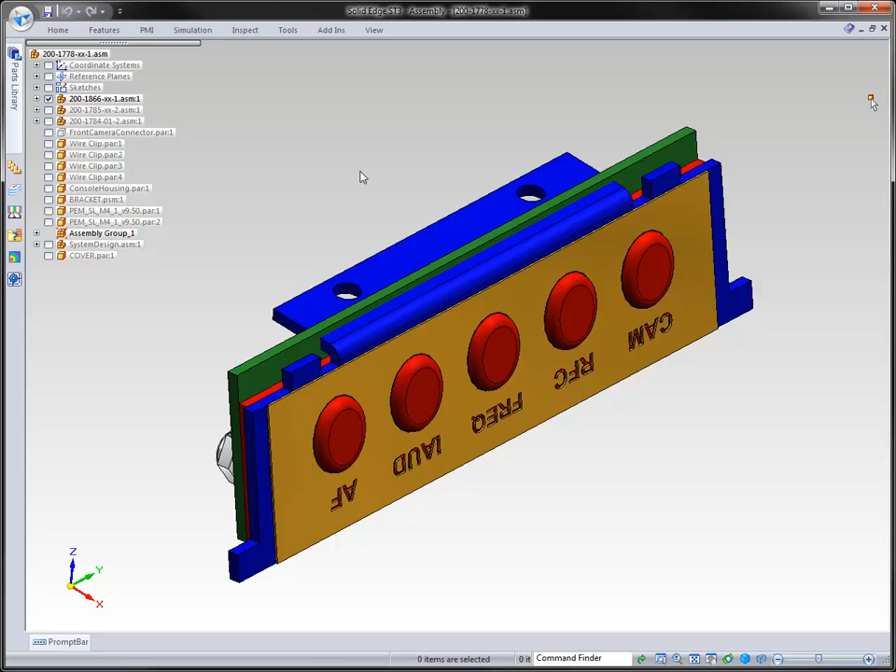With this, we actually have some connectors and some wires that we need to take a look at because we want to build a wiring harness inside of this particular file. You can see we have some connectors, and we also have some connectors for this board up to our camera.

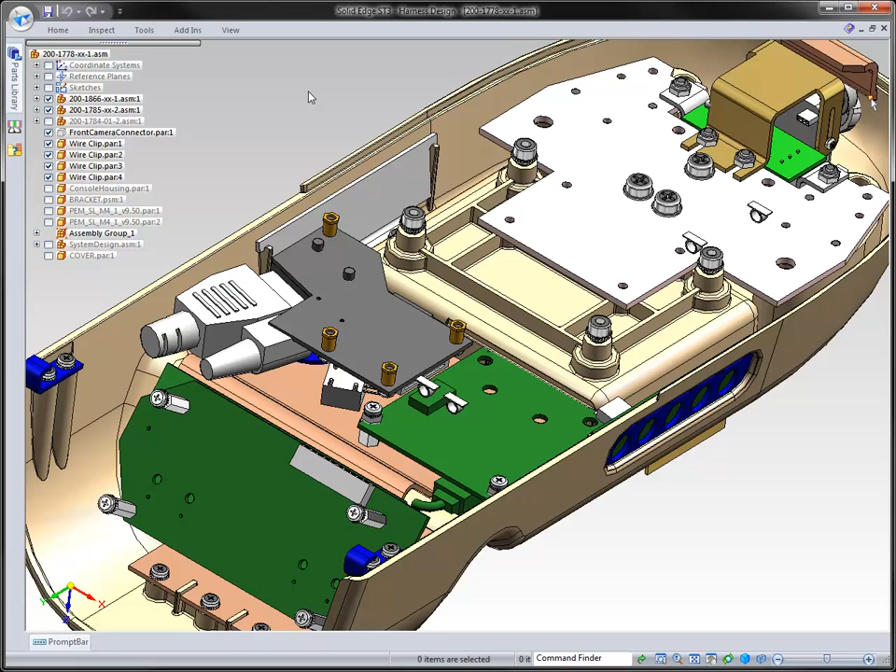Built into Solid Edge is what we call our harness design. Inside of here we want to be able to bring in some information. You can see that we have some other ECAD systems that we can bring information in from, and we have some specifically for this particular assembly. As we go through this, the wizard walks you through and shows you what component we're going to be connecting to.

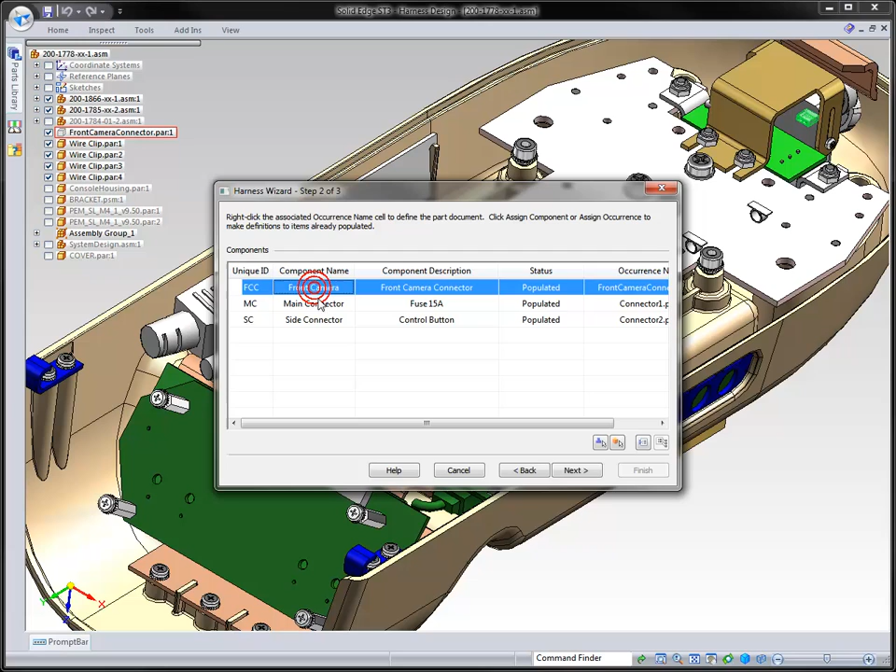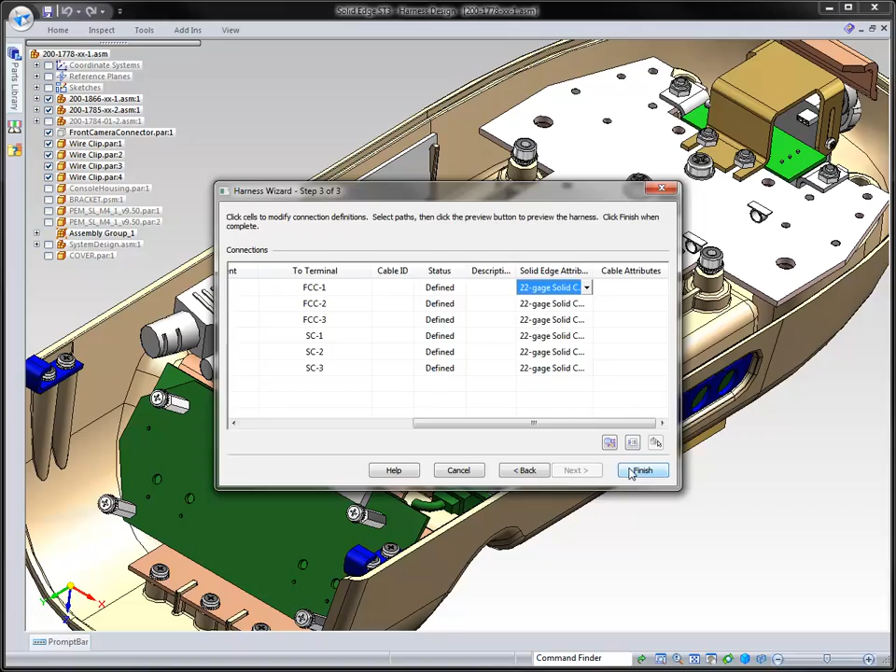In this case, the front camera. We have a main connector, and we have our side connector that we just looked at with our configurations. Then we choose the terminals we want to connect to and the components for each of those. We can see that information, and we can see what type of wire it's going to be. These are predefined from the ECAD system, but if you wanted to, you could change them at this particular moment. But we're going to hit finish. You can see how quickly we went in here and created these wires.

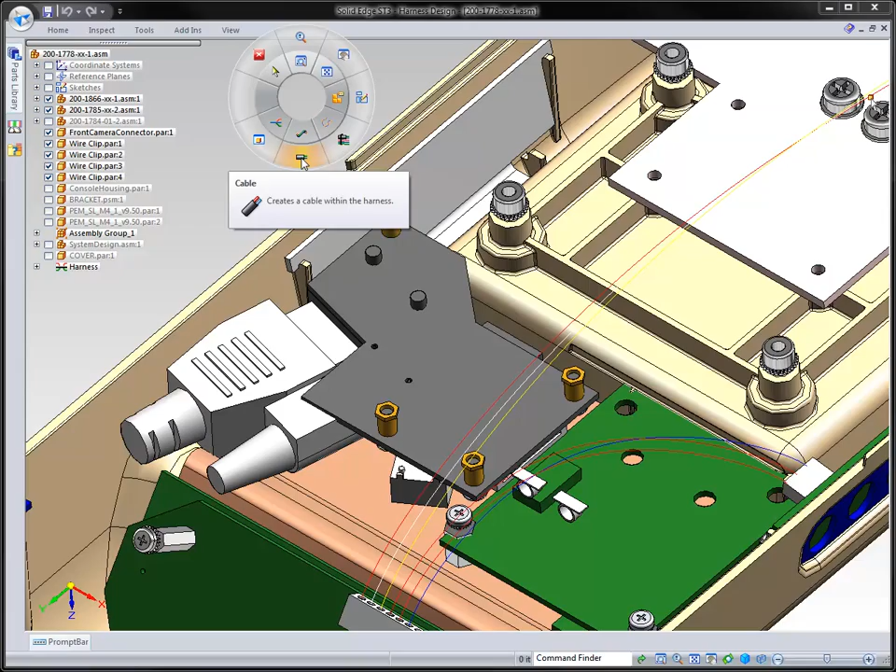Now this information is just out there, but we need to organize it. One of the ways to do this is to go inside and bundle the information, like if we had a tie wrap to tie these things together. So I just want to grab all these wires here and create this as my tie wrap. You can see that we can easily pull those together and bundle them in that one particular area.

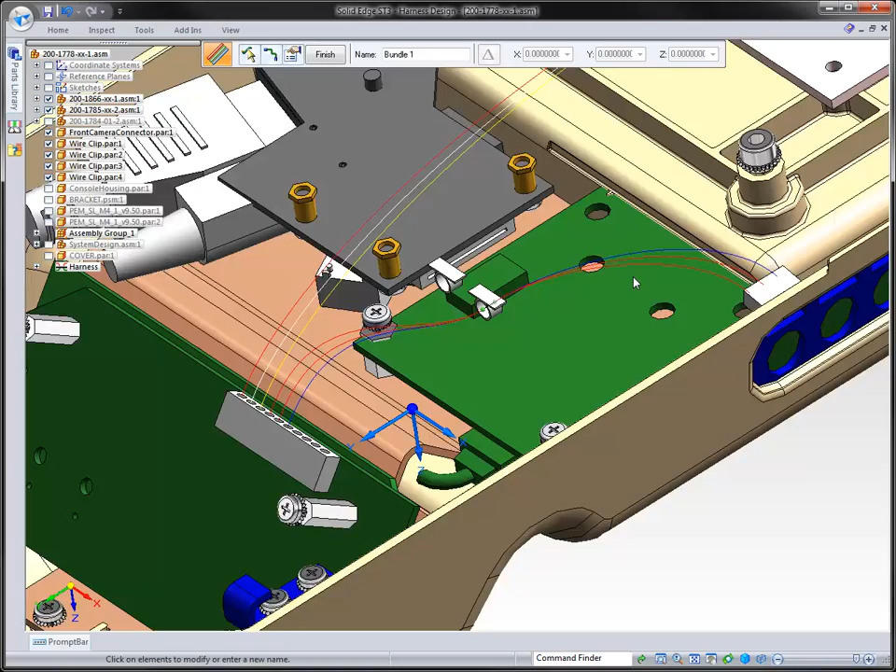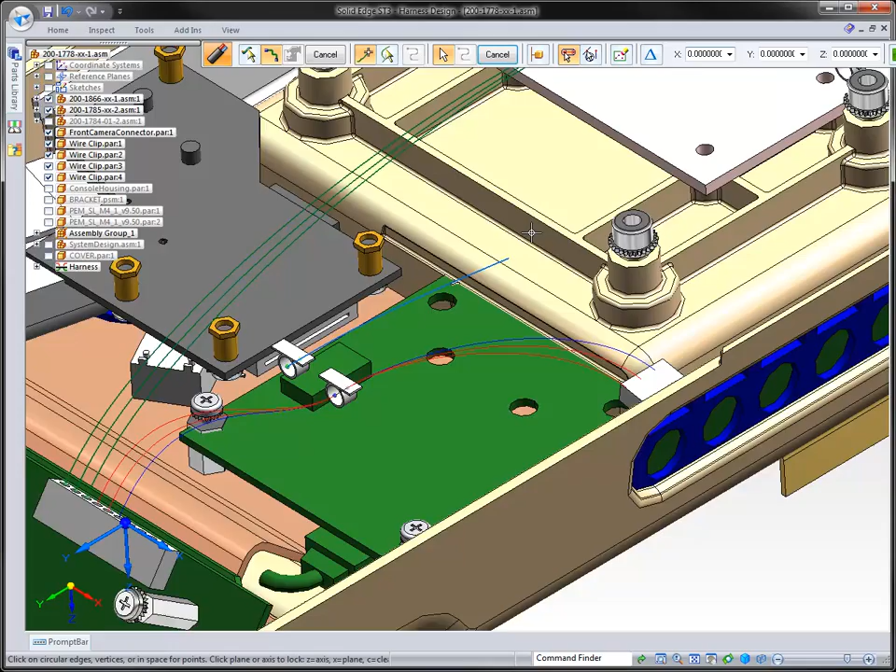The next thing I want to show you is how to create an actual cable. In this case, we want to create these three wires into a particular cable, and now I want to draw the path where it's going to actually be placed. You can see we have these wire clips that we can select up to, and that's going to be the path of my cable.

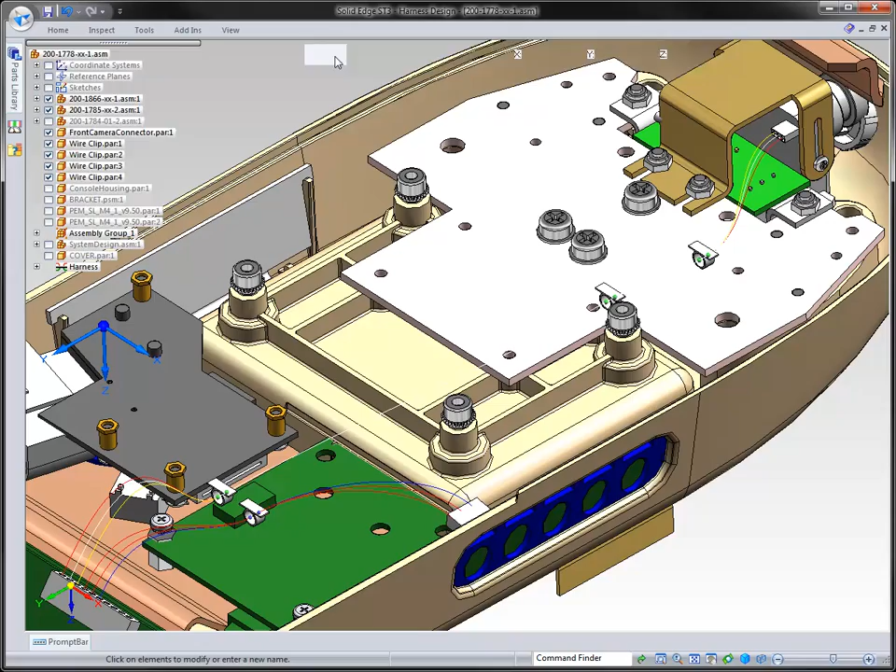But what is the size of the cable that we want to select? So you can select the size that you want, go ahead and preview that, and notice that it bundled all that information together into that particular cable.

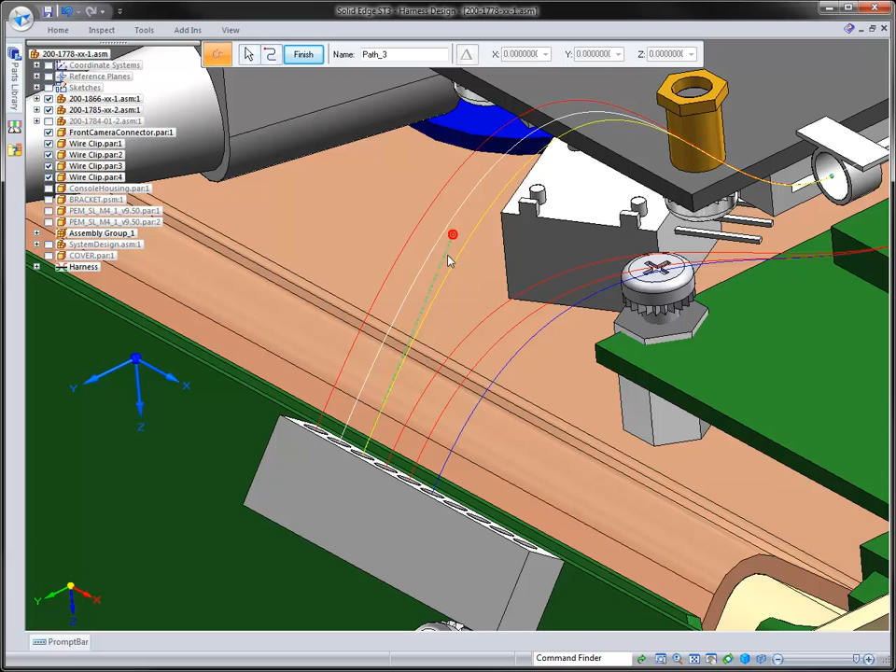Now in this case we can see that we have some wires that are kind of protruding out a little bit, but that's easy to fix. We can come in here, take a look at that particular path, and edit it. You can see that we can pull down that particular wire, and then switch to another one and keep pulling it down as well. So you can see how easy it is to select this information and make the edits quick and easy to our parts and our wires.

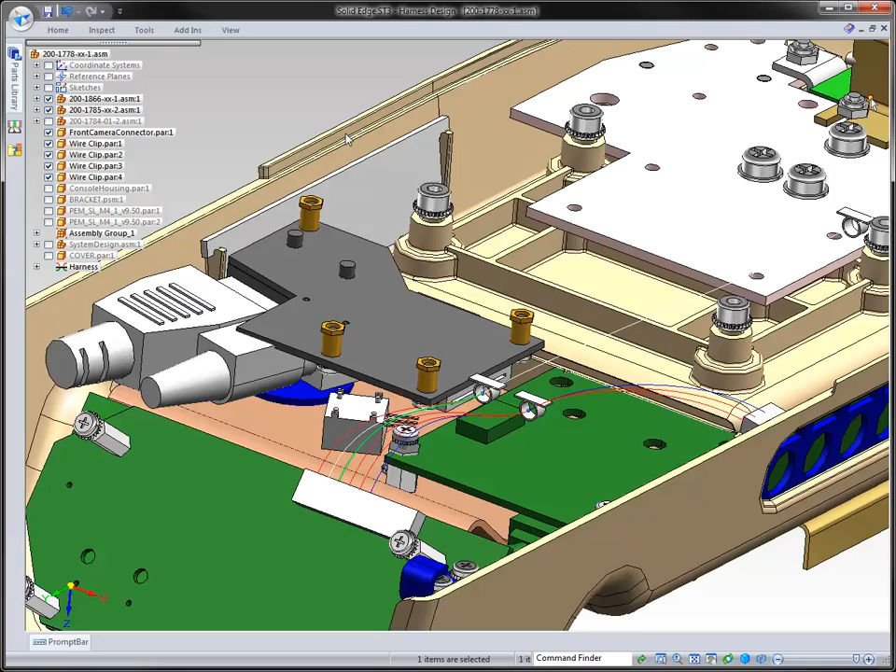Now we want to be able to see this information on the screen, and so what we can do is actually create what we call the physical conductor, and that will show this information to you. That was for the particular cable. Now we want to turn on the wires, and you can see those wires in place.

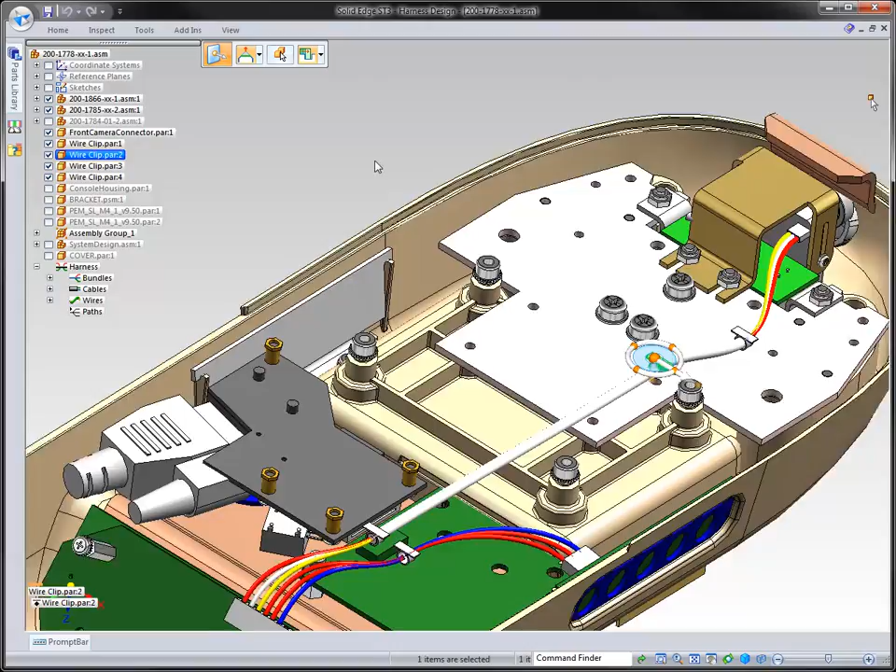Now what happens when you want to take a particular part, and let's say we needed to move that, we needed to be able to make a change in our design? Well, as you can see, just using our steering wheel, making that change easily takes place.

And if we want to make the different direction of that, we can pull it down as well. You can see how easy it is to make your changes to your design, very quick, very easy, and you can see how quickly that information updates.

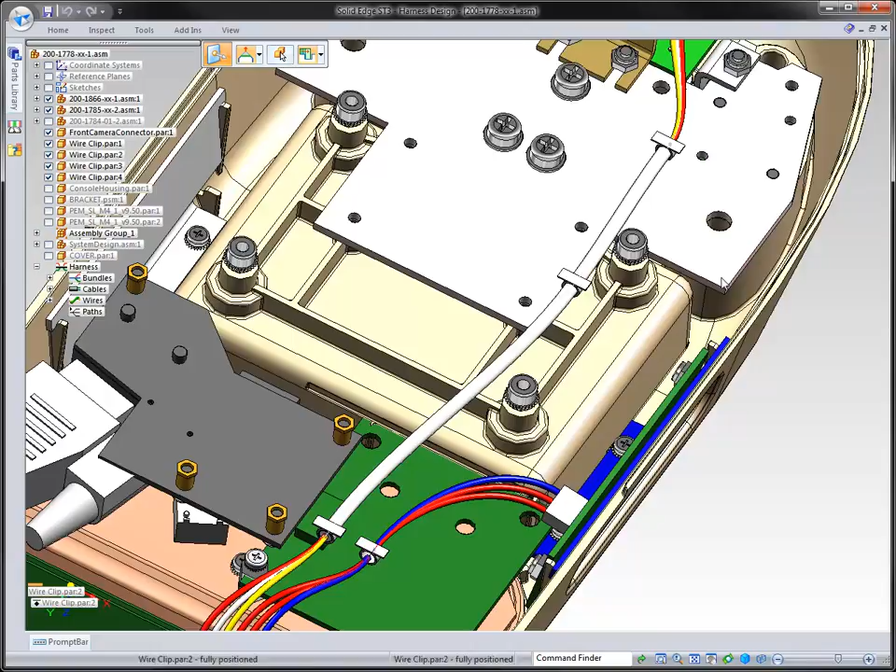So Solid Edge is a very powerful tool, not only in top-down design, but also dealing with the electronic components that you need for your assembly and your wire.

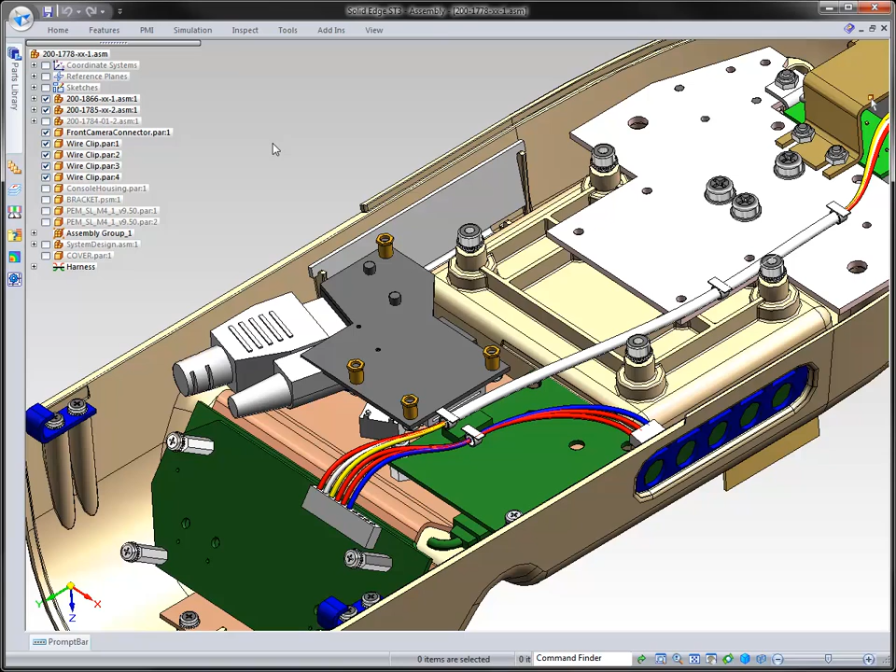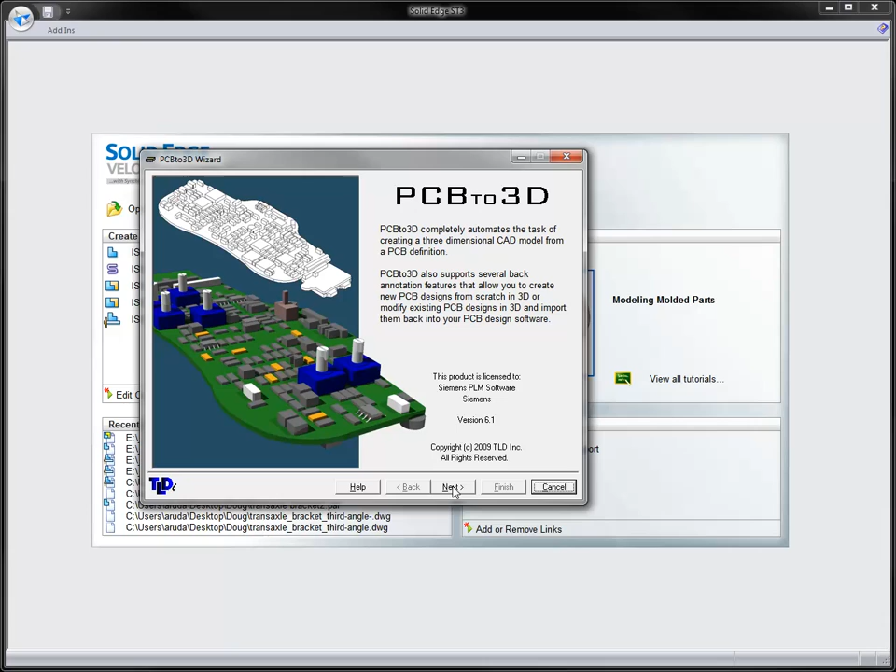So what we want to do now is take a look at bringing in a PCB board from our electronics department. And so what we want to do is take a look at a tool that works alongside of Solid Edge called PCB to 3D. What PCB to 3D does is allows us to bring in a PCB board file from our electronics department.

You can see that it will show you what the board is, the holes that are inside the board, the components that are placed in the board. What are the geometries for this? If you have some geometries that you have, where are the locations of those?

We can come in here and say that information is in this library file for these particular parts, and they're going to show you the height of these parts. And if you had any components that were 0, you could place them with a default height.

So this one, we're just going to give this one a name, and we're going to save it to our working directory. We'll just call it PCB, call it PCB1, and finish that off.

And then what it's going to do is it's going to take Solid Edge. It's going to go out and start building the information that you see on the screen, building every individual part and then placing them into an assembly that we can then bring into Solid Edge.

So this is taking the information, building them up as 3D components. Now this works both ways, so if we move any components in our board, we can send that back out through to the ECAD system, and that's in a file format that it understands.

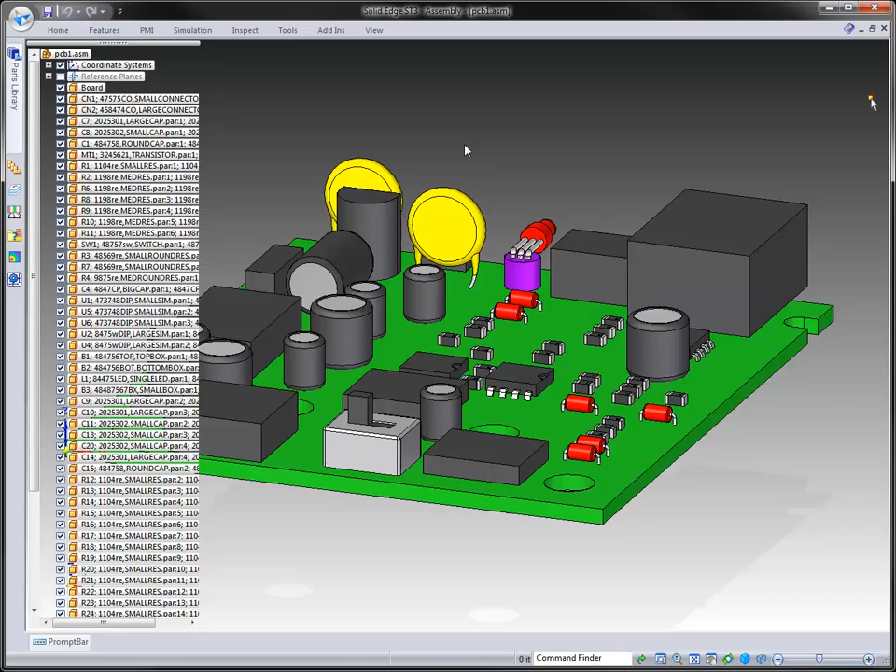And so that we see this, we see our components. We'll go ahead and just save that to be on the safe side. And what we want to do is be able to reopen our assembly.

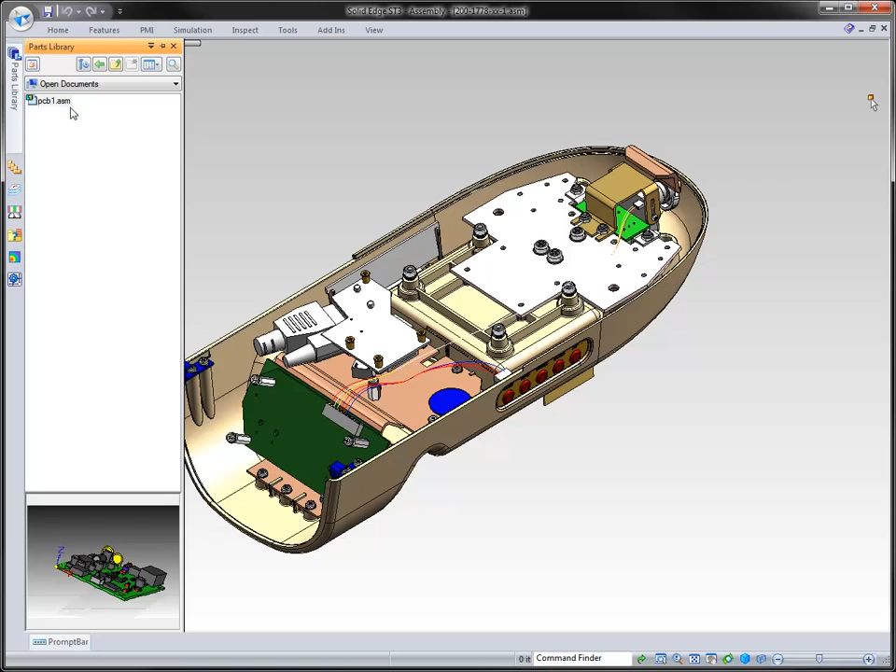And then we'll want to place this PCB board directly inside of our assembly. In doing that, we have the way inside of Solid Edge to say what are our open documents, where I can simply just drag and drop this component in here.

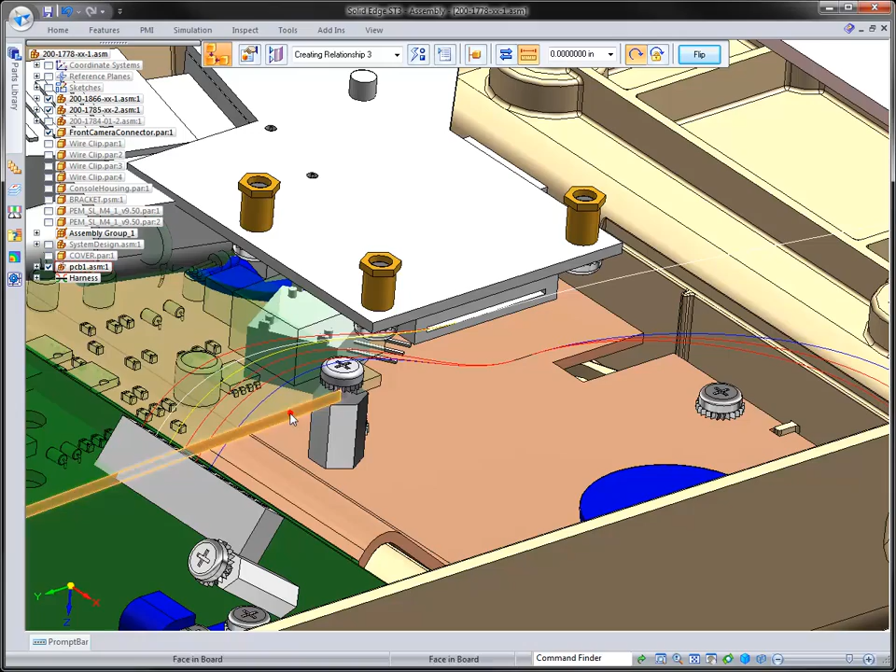I just want to select the bottom portion of that, and we just want to mount it to the top of this particular part. We just come along here, grab these, and then you can hold down the control key, and you can actually rotate this thing around to the point where you want to place it.

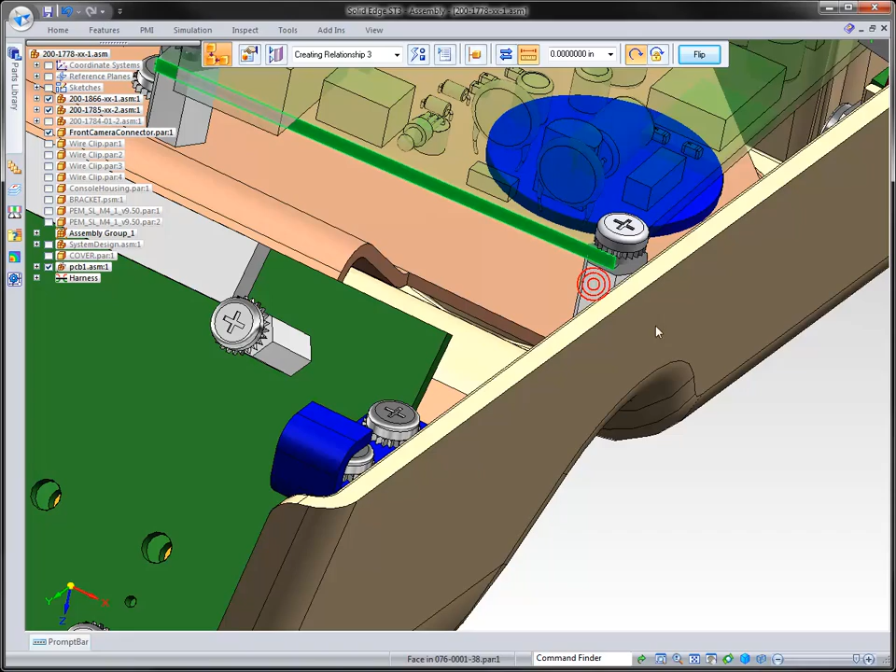And we can just do a planar align, select it, and it will give you the best possible relationship for that condition. So you can see how easy it is to bring in information into Solid Edge from your electronic designers and reuse that information and build your parts around it.

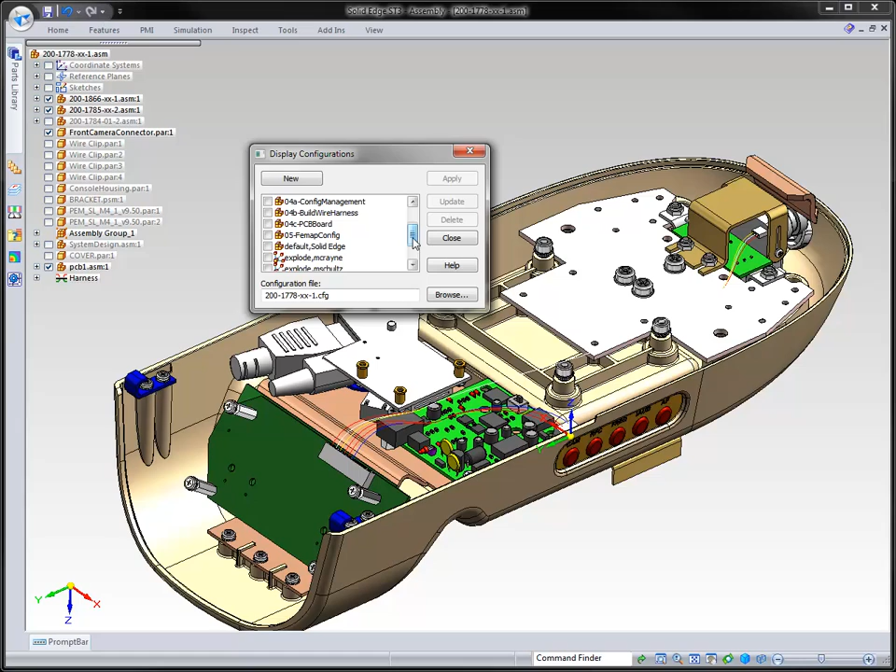Next, we want to take a look at where we want to analyze information that is inside of here. We're just going to clear up our screen, and we want to look at this sheet metal part that is holding this camera.

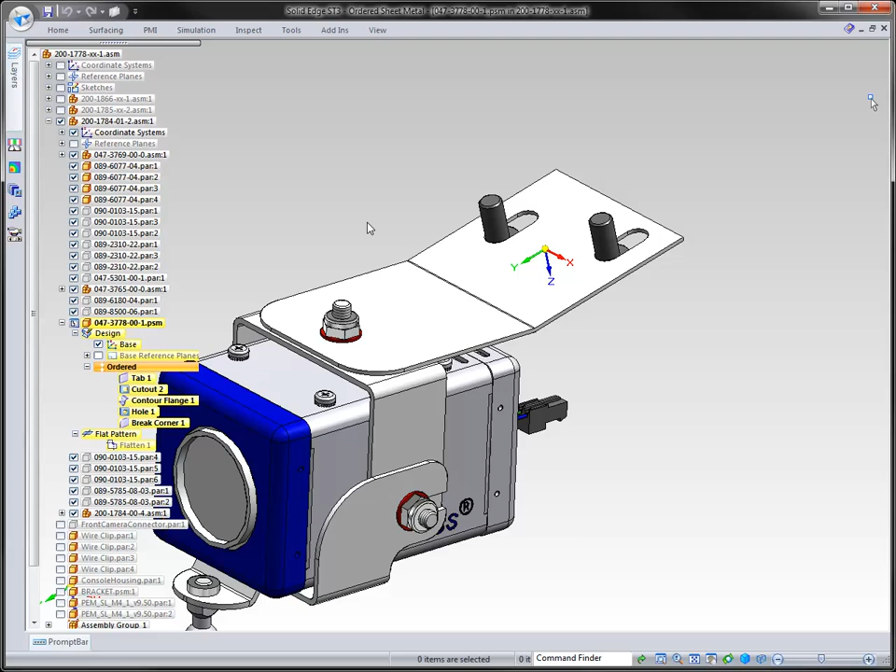And what we want to do is take a look at some tools that are inside of Solid Edge that are available to you free of charge. And one of those is what's called Simulation Express.

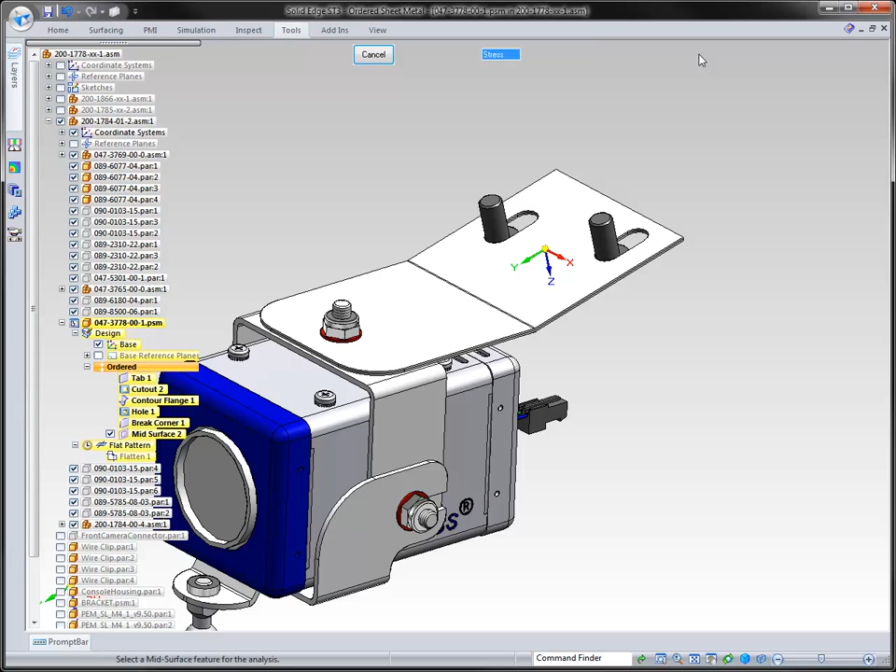With Simulation Express, you can select your part and see how it's being deformed, whatever, based on certain conditions. We grab the mid-surface, and we create the mid-surface of our part. We want to take a look at stress rather than modal, although we could do modal if we wanted to. It understands the material that's being placed inside of here.

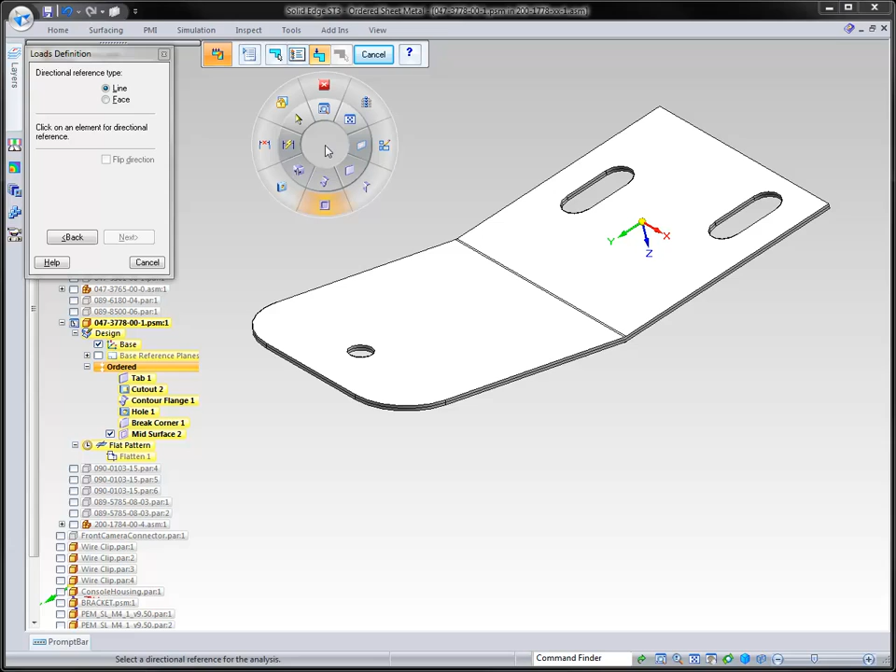We want to be able to add a load. In this case, I want to turn off a few things. Let's go back to my load, and I want to add force. Then where do we want that force placed, and what is the direction? We want to utilize the information around us to know which direction that is going in. If you always want to flip the direction, you can. So now we've added our load.

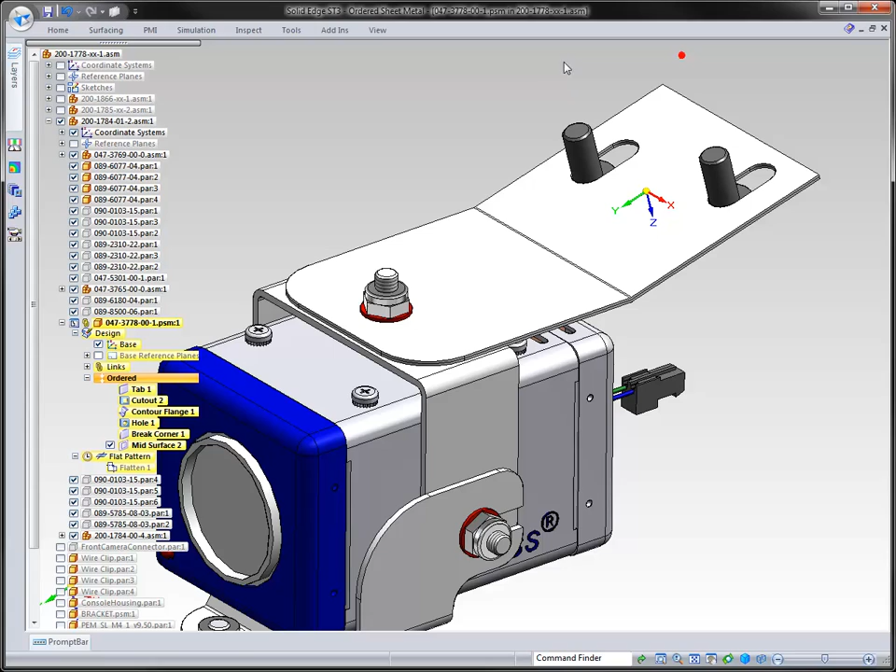Now we need to constrain. We're just going to constrain this face, and let Simulation Express find the condition, find the information for us. As it's doing this, you can change the mesh size. You can change different things from here, but it's a very simplistic and easy way to find out what your part is actually doing.

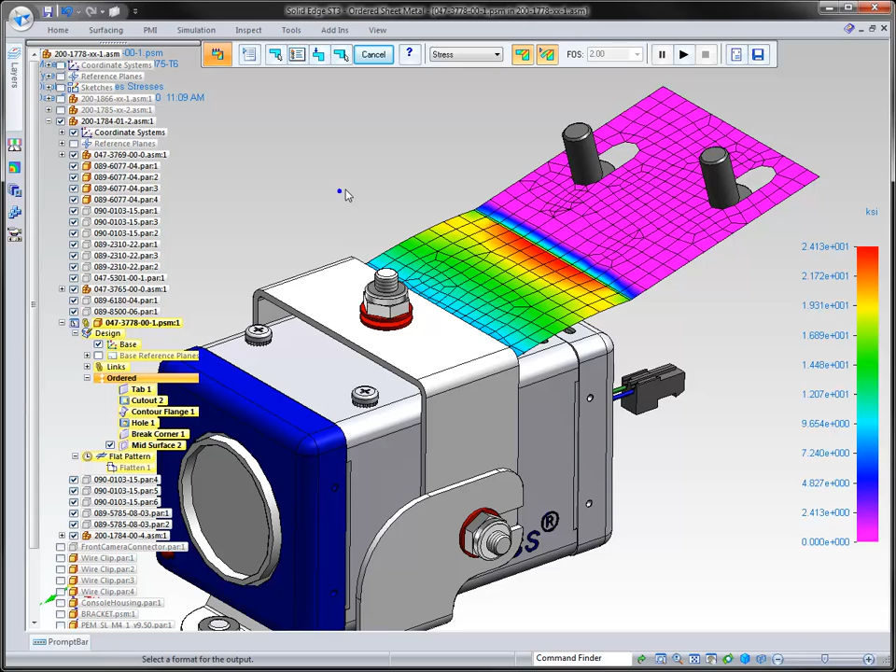We can go through and do a play of stress, one of displacement to see the displacement, but also we want to take a look at factor of safety. For factor of safety, we'd like the part to be almost completely green. In this case we have some yellow, so that's an area of concern for this particular part.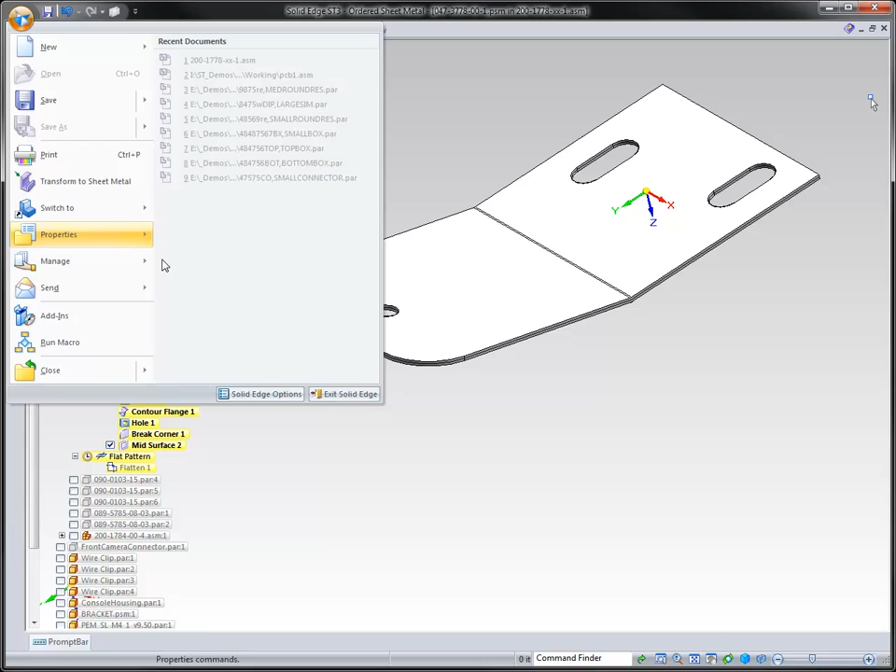There are a couple ways you can change this. One, you can change the bend radius of the file, or we can change the material, or just change to a thicker gauge. So let's just go to a gauge of 16, and now we have a thicker part.

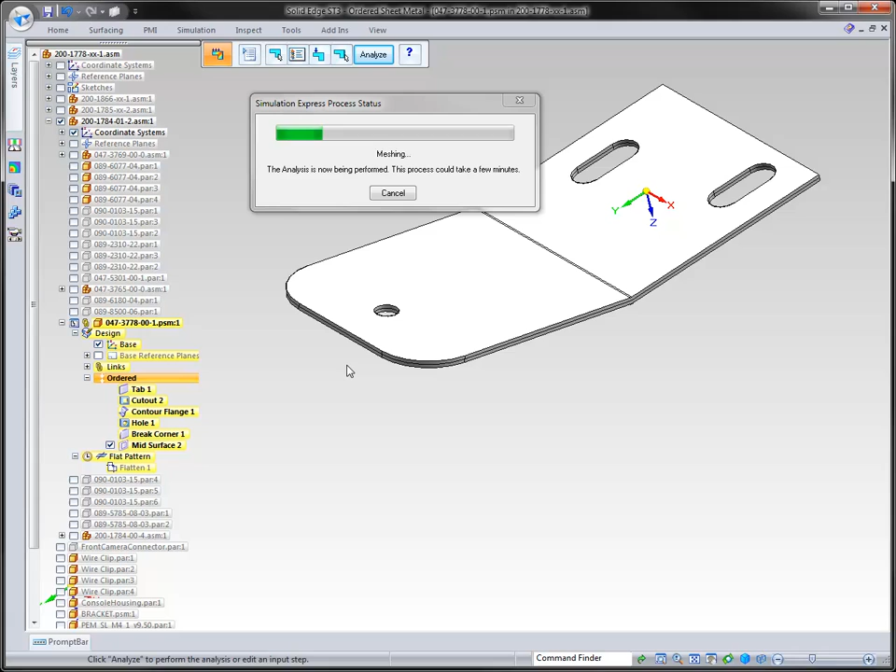Let's take a look at it, and it's going to tell us that the model has changed. It already has all that information we placed inside, and now it's going to remesh and reanalyze the part. We can take a look at stress, displacement, and factor of safety, and see that that is a lot better. If we wanted to, we could still bump up the gauge so this is all green. But you can see how quick and easy it is to change this.

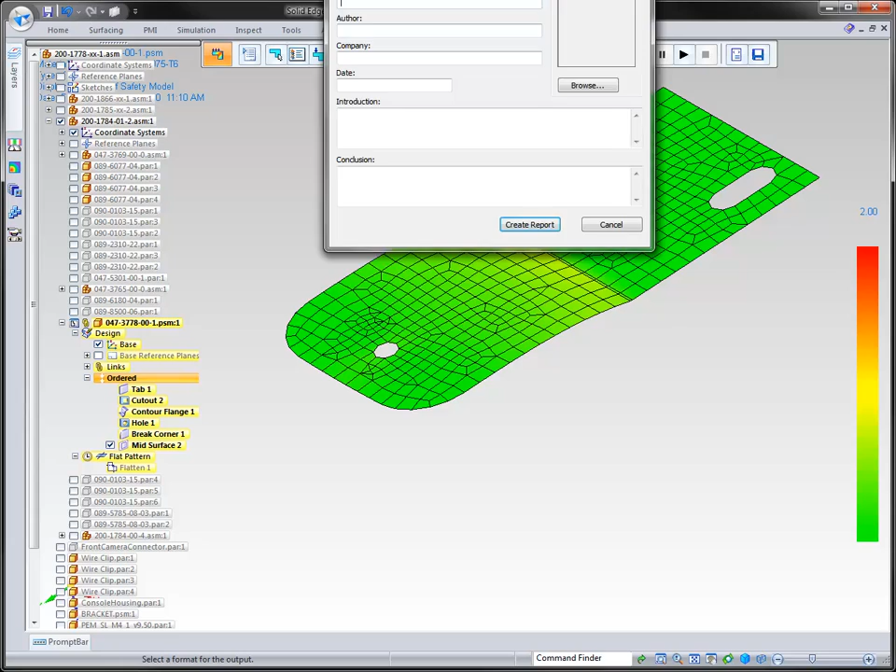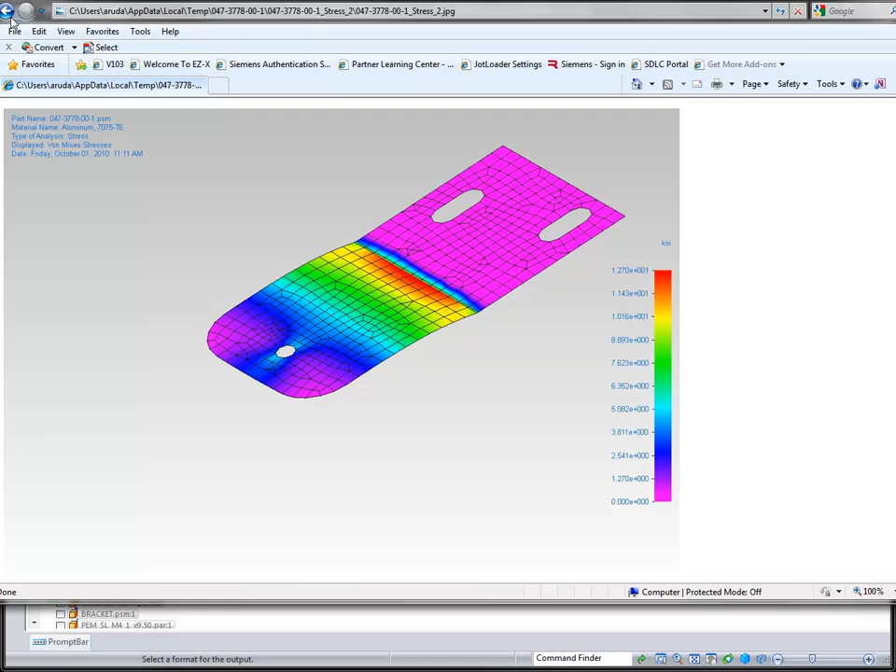We can also take a look at a report. We'll just say design report for this one, and given company, we'll just say today. You can put a logo, you can put some introduction information, some conclusion information in there, but just to kind of show you what the report is going to look like. It's a very HTML type report. You click on the images, and it's going to show it to you, which gives you a nice report.

We also do have a true expansion of Simulation Express through the simulation tool, where you can create more loads, more constraints, different types of meshing that you want to place on there. That is an add-on to Solid Edge, but for the designer who just wants to quickly see what his part is going to do inside of there, Simulation Express does a lot for you.